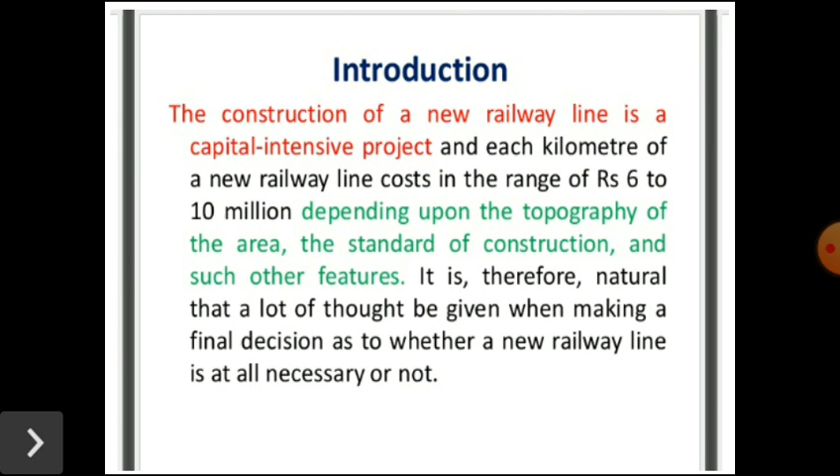So what are the needs for construction of a new railway line? There are basically 5 reasons. The first one is strategic reason. It is sometimes necessary to extend the existing railway line to a new point of strategic importance so that the defense forces can move quickly to some areas in case of any emergency.

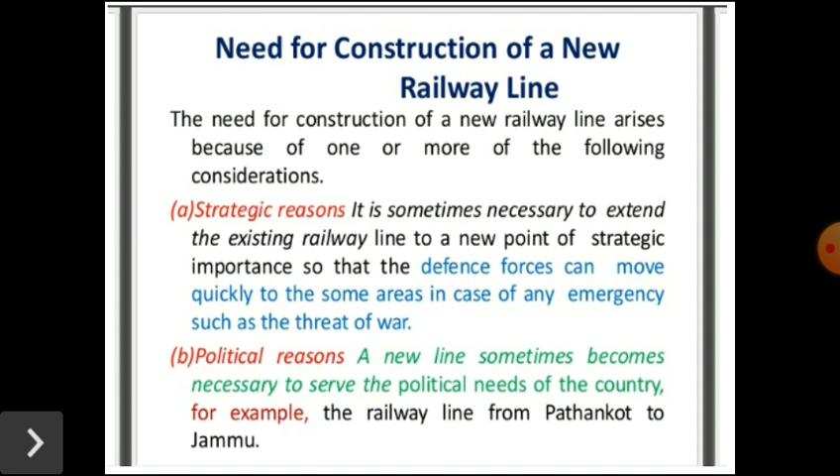Next one is political reasons. A new line sometimes becomes necessary to serve the political needs of the country. For example, the railway line from Pathankot to Jammu. The next one, development of backward areas. Due to the new railway lines, the backward areas may be getting developed. Experience has shown that once railway communication is available, backward areas develop very fast. For example, the Assam railway link.

Next one, to connect new trade centers. Sometimes new trade centers are connected with railway lines for the quick transportation of goods between two trade centers or from the point of production to the point of consumption.

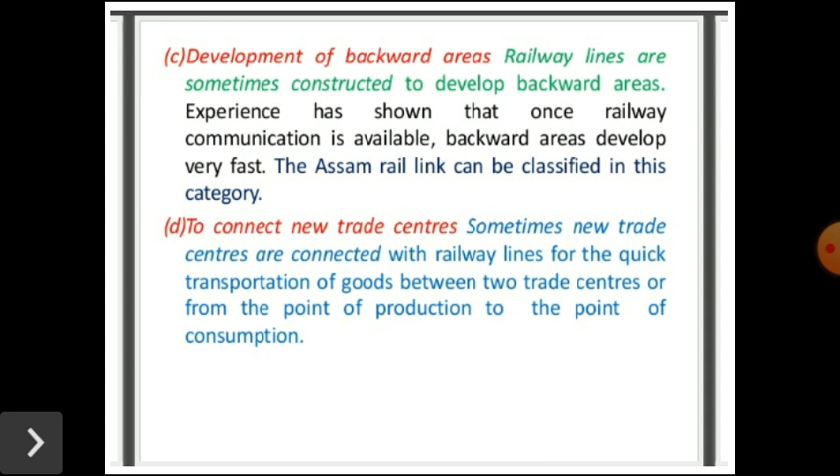The next need is to shorten the existing rail link. The existing routes between two important points may be longer than required. So the new railway lines are constructed on a shorter alignment in such cases. A short route is not only economical but also helps in the faster movement of goods and passengers. Example, the Konkan Railway. So these are the needs for a new railway line.

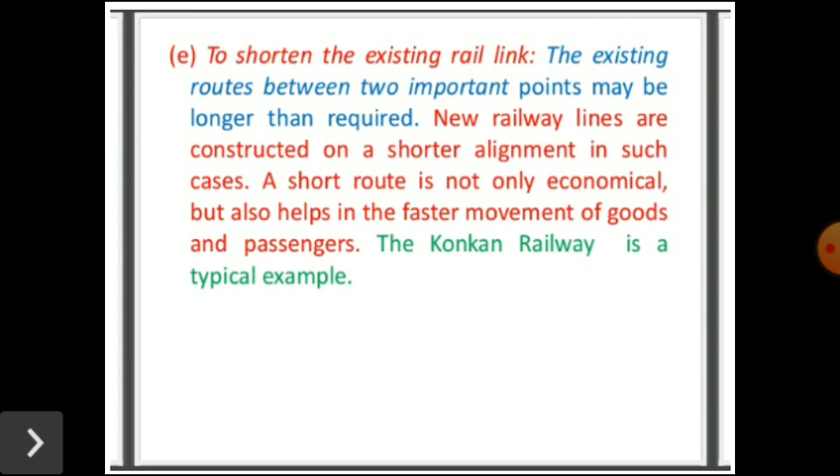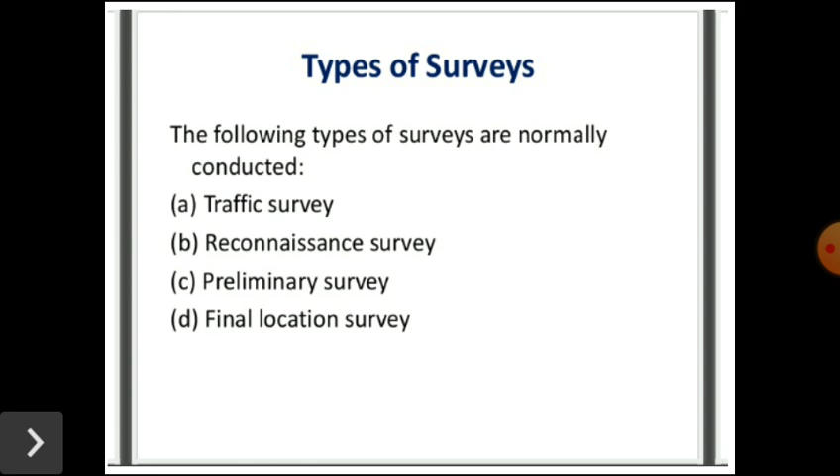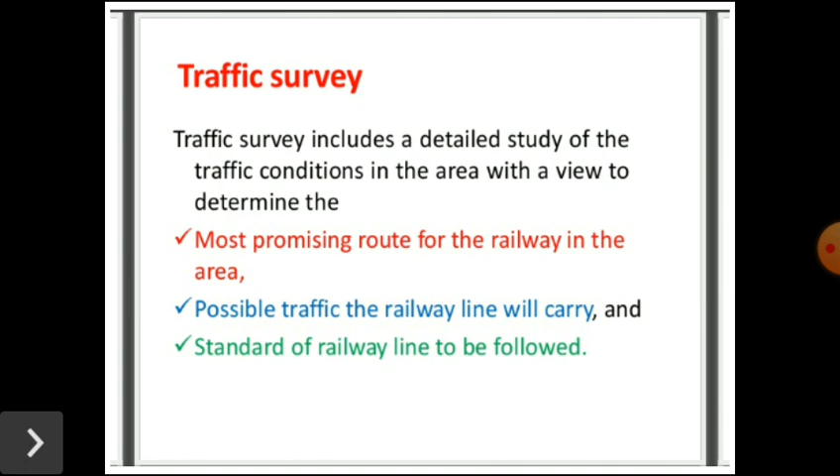So before going to construct a new line, we have to study some types of surveys. They are traffic survey, reconnaissance survey, preliminary survey and final location survey. In traffic survey, we have to study the most promising route for the railway in the area, possible traffic the railway line will carry and standard of railway line to be followed. These are the details we have to collect and study from the traffic survey.

In this survey, we have to collect the details of the human resources available, agricultural and mineral resources, pattern of trade and commerce, industries located and projected, prospects of tourist traffic, existing transport facilities, locations of important government and private offices, planning for economic development of the area of the proposed construction of a line.

So the traffic survey team should make an assessment of the traffic likely to be carried by the new line. While carrying out the survey, details of traffic likely to be offered by various government organizations, public bodies or private enterprises should be gathered.

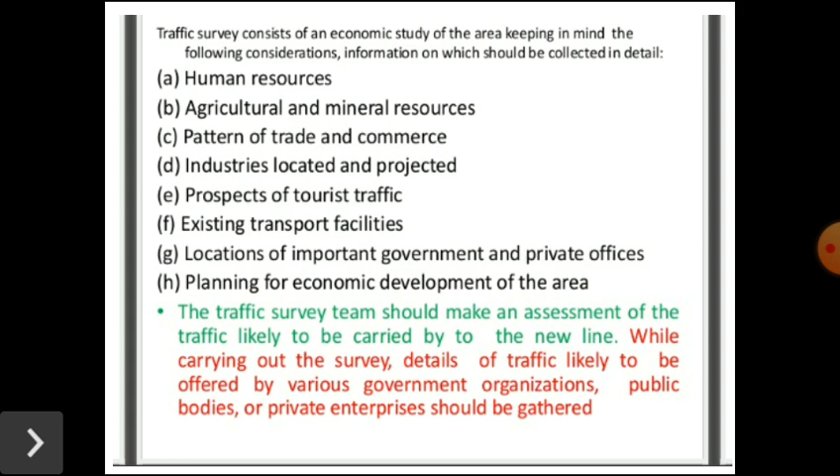Next, reconnaissance survey. This survey consists of a rapid and rough investigation of the area with a view to determine the technical feasibility of the proposal as well as the rough cost of one or more alternatives to the new line. This survey is based on contoured survey map and other data already available without carrying out detailed investigation in the field.

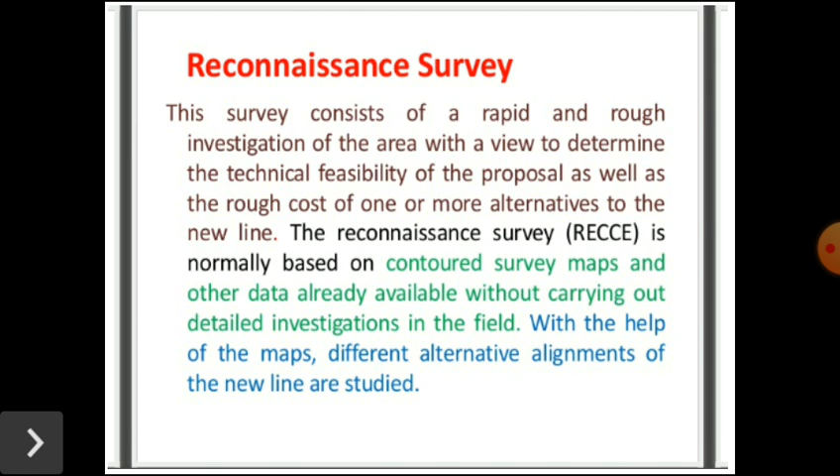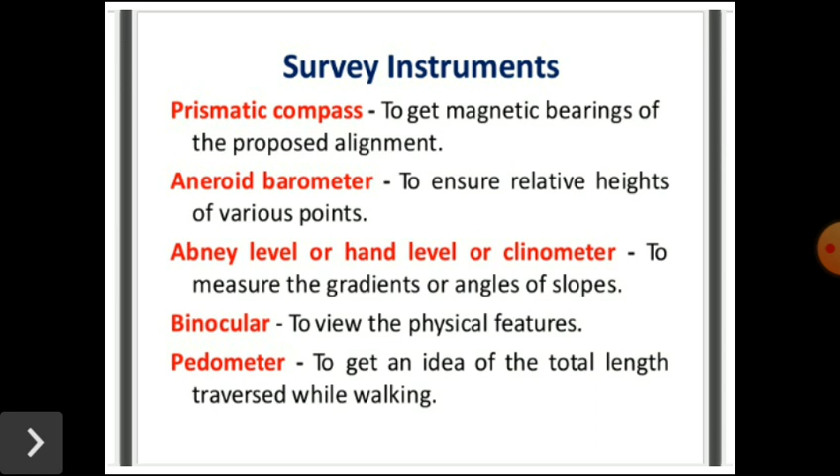The survey is studied with the help of some surveying instruments. They are the prismatic compass, aneroid barometer, Abney level, binocular, pedometer. By using these instruments, we make the reconnaissance survey. After that, the preliminary survey should be carried out. It consists of a detailed instrumental examination of the route selected as a result of the reconnaissance survey in order to estimate the cost of the proposed railway line.

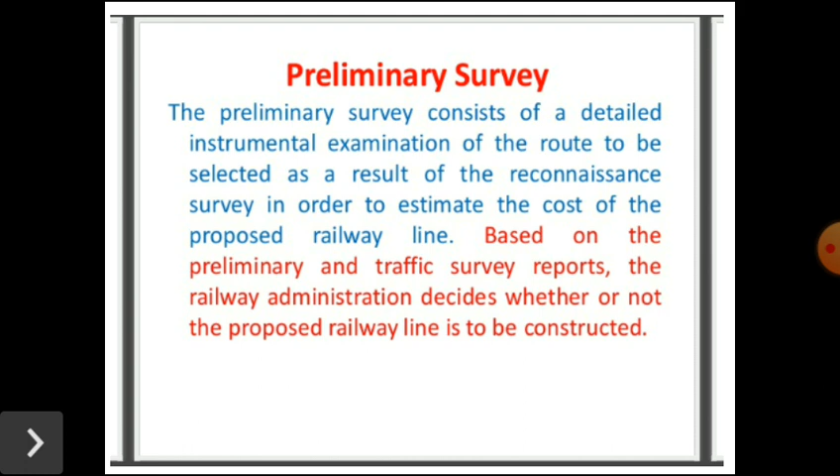Based on the preliminary and traffic survey report, the railway administration decides whether or not the proposed railway line is to be constructed. So the preliminary survey is the most important. Based on the survey reports only, whether the line should be proposed or not will be considered by the railway administration. For this survey, we are using some instruments. They are theodolite, tacheometer, dumpy level, plane table, prismatic compass.

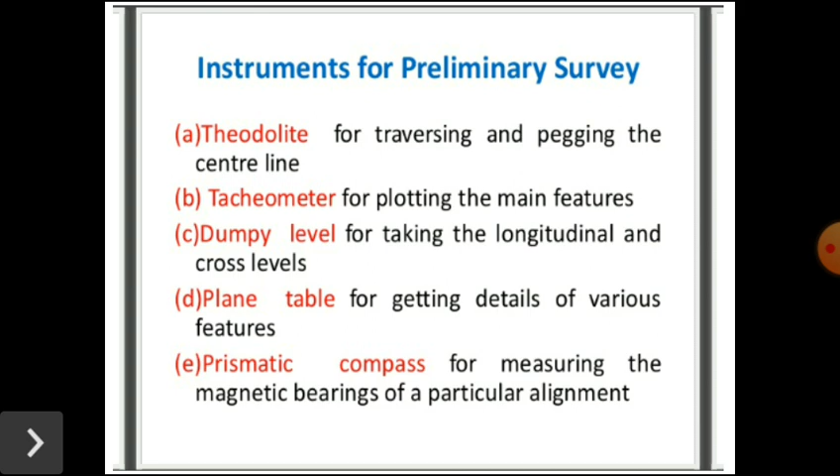And finally, final location survey. Once a decision has been taken for a particular railway line to be constructed, a final location survey is done. The instruments used are generally the same as in the case of the preliminary survey. Final location survey is done to prepare working details and make accurate cost estimates in certain cases. So based on the survey and some prepared maps, the railway line should be constructed.